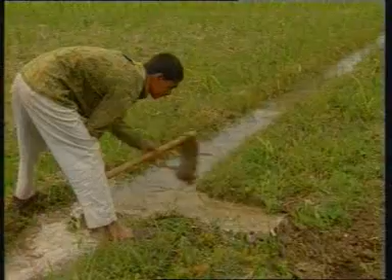India has got 1/5 of the world's irrigated area, which contributes to make it potentially one of the richest agricultural countries in the world. Irrigation has been practiced in India from very early times through wells, tanks and small channels.

But the increased demand for food production has resulted in development of various other irrigation schemes. These irrigation schemes mainly consist of storage or diversion structures and distribution systems. In this program, we will cover the distribution systems comprising of open channels.

Natural drains that exist on the earth vary in size from tiny hillside rivulets, streams, small and large rivers, to tidal estuaries. The geometry of the natural channels is in general very irregular. But normally, these channels have plenty of water and have their own course.

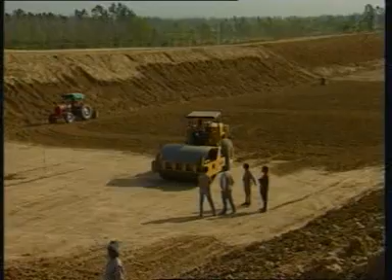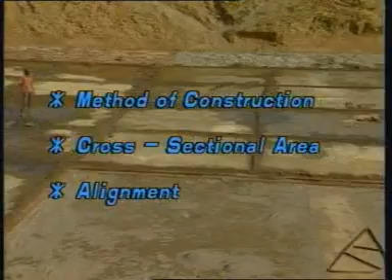Hence, they do not provide water at the desired location and in required quantities. This has resulted in human intervention with the natural channels and the development of artificial channel networks. These channels are classified according to their method of construction, cross-sectional area, and alignment. The canal is a long and mild slope channel which may be lined or unlined.

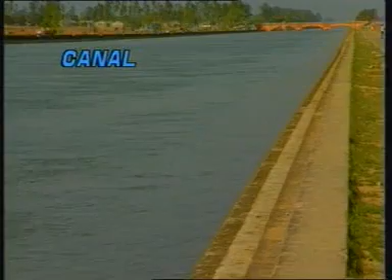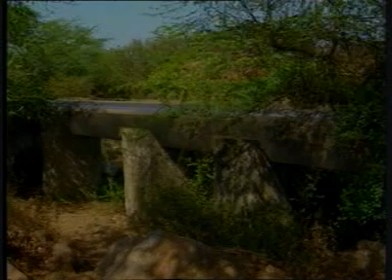The flume is a channel usually supported on or above the surface of the ground to carry water across a depression. A channel having a steep slope is called a chute. If the drop in elevation occurs in a short distance, the chute is then called a drop.

A covered channel flowing partly full to drain water across the highway and railroad embankments is called a culvert. It could be rectangular or circular. You might have noticed by now that these artificial channels are designed with regular geometric shapes.

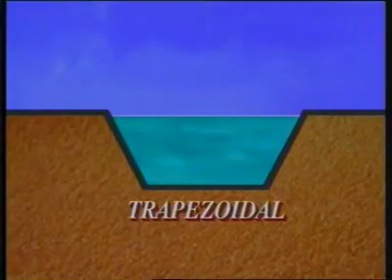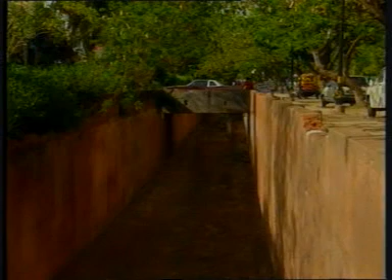The trapezoid is the most common shape for channels with unlined earthen banks. Generally, it has stable side slopes. The rectangle: channels having rectangular cross sections are built of stable materials such as lined masonry, rocks, or timber. Triangular sections are used only for small ditches, roadside gutters, and laboratory works.

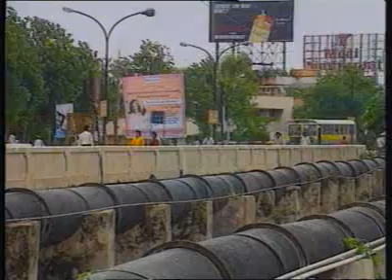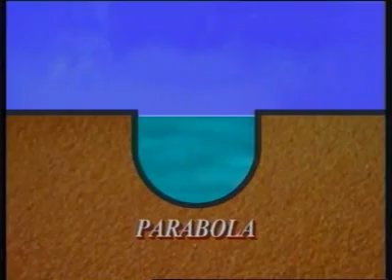The circle is a popular cross-section for sewers and culverts. In practice, other shapes are also used, where the sharp corners are rounded off. These are parabolas, round-cornered rectangles, and round-bottom triangles. Now the question is, which is the most efficient cross-section?

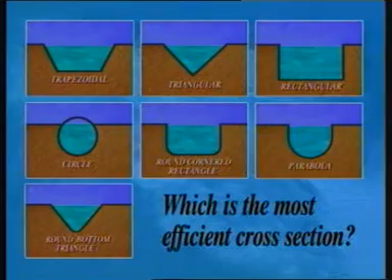The efficient cross-section is the one which, for a given slope and area, has the maximum carrying capacity. For such a section, the wetted perimeter will be minimum and hydraulic radius will be maximum. For an open channel, the semicircle is the most efficient cross-section.

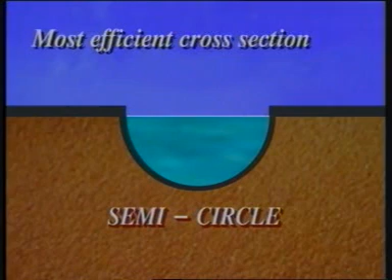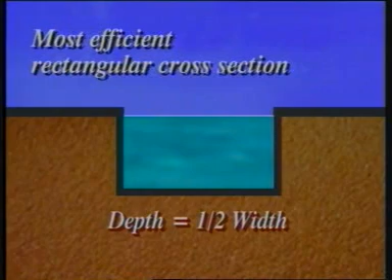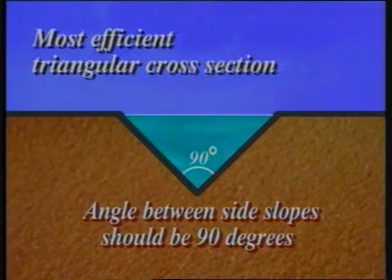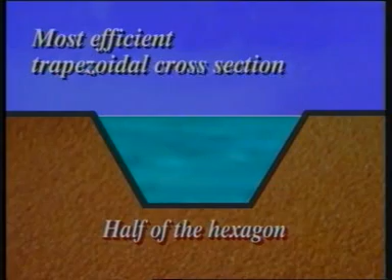However, if the rectangular cross-section is chosen, it will be half of a square, that is, the depth equal to half of the width, to make it the most efficient cross-section. If the cross-section chosen is triangular, the angle between the side slopes should be 90 degrees. But in practice, trapezoidal sections are mostly used to carry large discharges. Half of the hexagon is the efficient cross-section in this category.

The channels are aligned so as to permit gravity irrigation in maximum possible areas. The alignment should be such that it reduces the capital investments and maintenance costs and saves the transmission losses. Let us understand the alignment of canals with the help of a model.

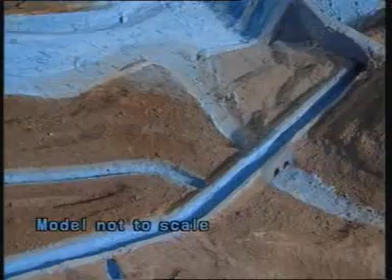Irrigation channels are generally aligned with reference to contours. A channel aligned nearly parallel to the contours of the country is called a contour channel. As some contours are higher on one side of the channel, a contour channel irrigates only the other side of the country.

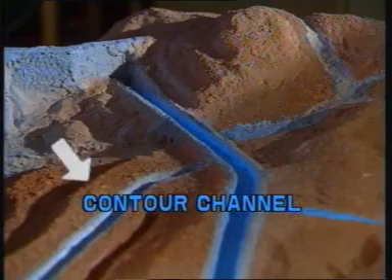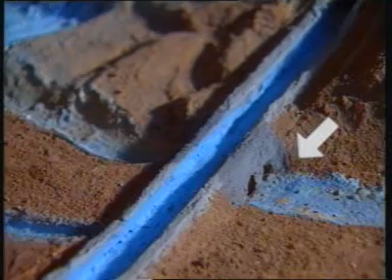While laying a canal system, we may encounter natural drainage such as a river which crosses the canal at right angles. When the drainage bed level is lower than the canal bed level, we construct an aqueduct to carry canal water. An aqueduct is preferred when the drainage is wide and of higher discharge capacity, and the water flows for longer durations.

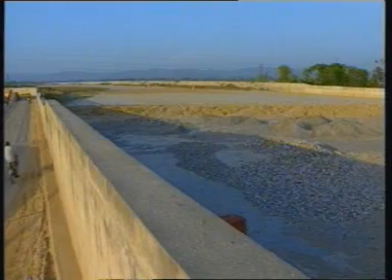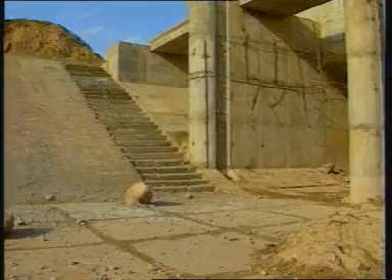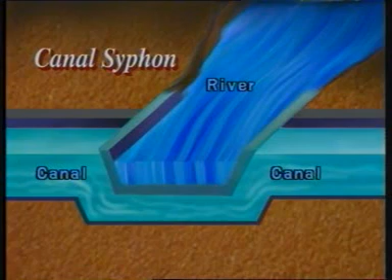But the situation may be reversed as well. When the bed level of the river is higher than the canal bed level, a super passage is constructed. It is a case when the canal is in deep cutting. However, when the headway clearance between the river bed and canal supply level is small, a canal syphon is built. The canal water is passed through an inverted siphon under the drainage, and the bed level of the canal is raised again on the other side.

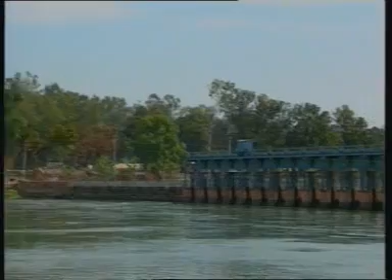If the river and canal are almost at the same bed level and the flood discharge is intermittent and large, it would be economical to build a level crossing with regulating structures. In this system, sometimes the canal supply can be augmented with river discharge.

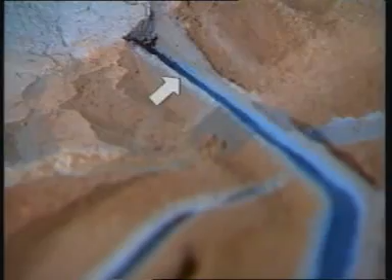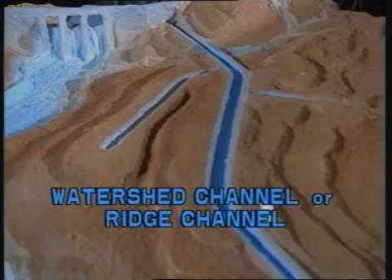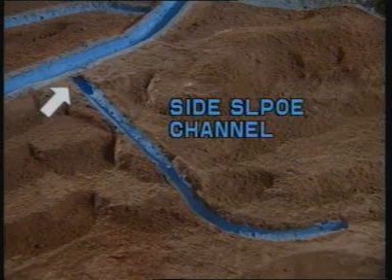After the head reach, a channel aligned along the ridge of a watershed is called a watershed channel. It can irrigate on both sides. Here, cross-drainage works are obviated. A channel aligned roughly at right angles to the contours is called a side slope channel. The cross-drainage works do not intercept this channel.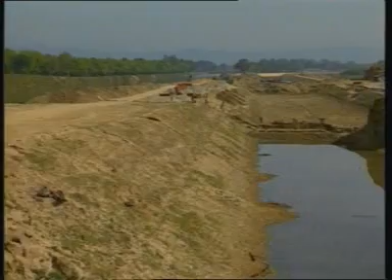However, in the alignment of the canal, there may be a situation that we may have to avoid religious places, other monuments and villages. In order to avoid these obstructions, to fulfill topographical conditions, and for diversion works, curves in the channels are introduced. Curves in unlined canals are made as gentle as possible, since they lead to disturbance of the flow, and they also have a tendency to silt on the inside and to scour on the outside of the curve. For the same discharge, the radius of curvature for lined canals is less than for the unlined canals.

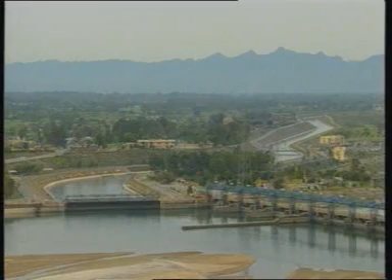Effectiveness of an irrigation channel network depends primarily on the command area it serves. Therefore, channels used for water distribution purposes require a high level at the point of delivery to serve the area under command without any difficulty. Normally, the channels with high discharge require less slopes than smaller ones. When the fields are high, adjacent to channels, water may have to be lifted from the channel.

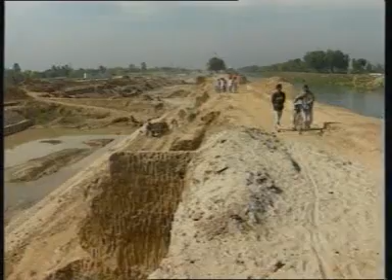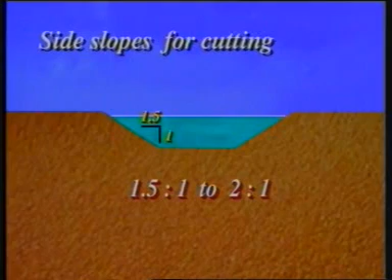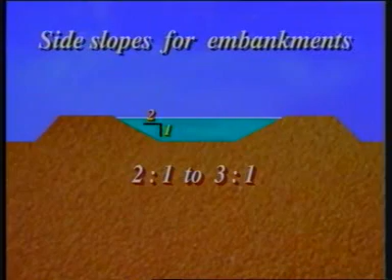The side slopes of the canal depend upon the nature of the soil in which the channel is to be excavated, depth of cutting, and the height of the embankment. Generally speaking, side slopes should be made as steep as possible and should be designed for high hydraulic efficiency and stability. The minimum slopes usually allowed vary from 1.5:1 to 2:1 for cutting. For loose sand embankments, the side slope ratio varies from 2:1 to 3:1. When canals are dug through rocks, the slopes are kept maximum, varying from 0.25:1 to 0.5:1.

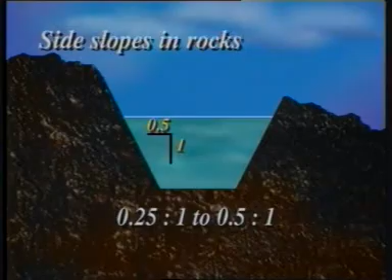In order to allow for fluctuations in water level, a freeboard is provided. The freeboard is measured from full supply level to the top of the bank. The amount of water that we feed in a channel does not reach the fields. A major portion of the water is lost through seepage. The seepage losses constitute 35 to 50% of available water at the canal head. Seepage losses are considerably reduced by lining the canal. Lining also prevents waterlogging, weed growth, and reduces silting and erosion in the canal.

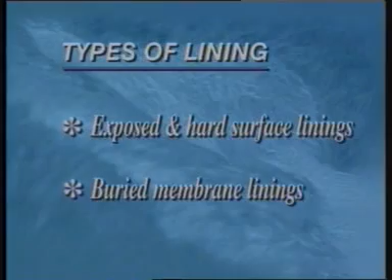Various types of lining can be mainly grouped into two categories: exposed and hard surface linings, buried membrane linings. The initial cost of exposed linings is generally high. They are recommended for use where structural safety is the primary consideration. There are several types of linings. Thick compacted earth lining may prove to be economical where suitable material for construction is available at site.

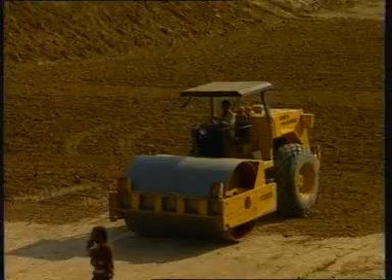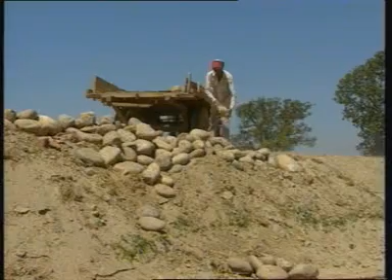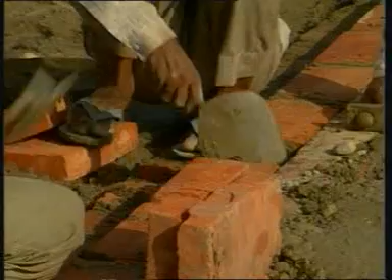Boulder lining is another economical lining where boulders obtained during excavation are readily available. It has very little flexural resistance or flexibility. Such lining is not satisfactory for canal infilling. Brick lining has been extensively used. It has the advantage of low initial and maintenance costs and quicker construction.

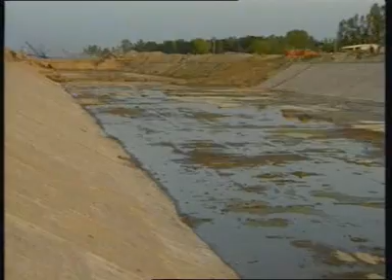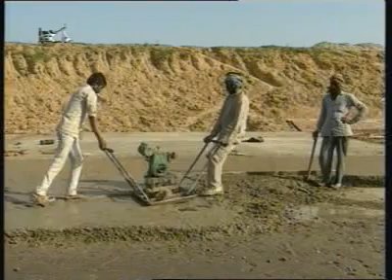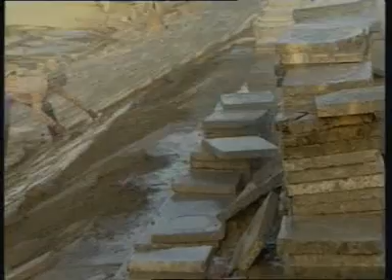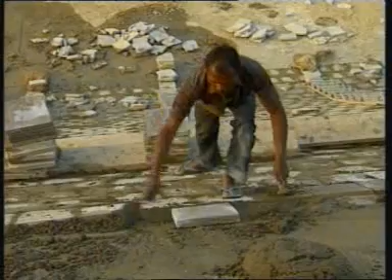Cement concrete lining is preferable because of its greater resistance to erosion and where the channel is to carry high velocity water. Precast concrete tiles are more compact and impervious. These tiles are laid in 1:3 cement mortar in single or double layers directly on the compact subgrade.

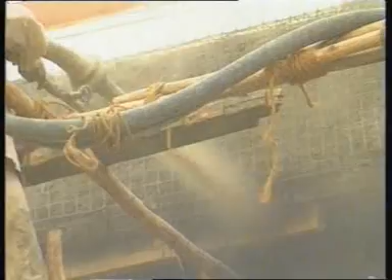In shotcrete lining, cement mortar is applied by pneumatic pressure. It can be placed over rough subgrade. Sandstone lining is used in field channels depending upon its availability and cost effectiveness.

Plastic film and a layer of bentonite protected by earth or gravel cover are cheap linings. These are commonly recommended linings. But the drawback in membrane linings is that it is susceptible to damage by weed roots. In this case, permissible water velocity is also limited in order to avoid erosion.

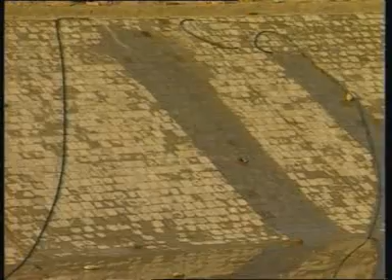Out of so many types of linings, what are the criteria used in the selection of a lining? We put this question with reference to the modernization of the Upper Ganga Canal to Shri R.C. Goel, Chief Engineer, Irrigation Department. The basic criteria are two: costs and the time that we use in their construction.

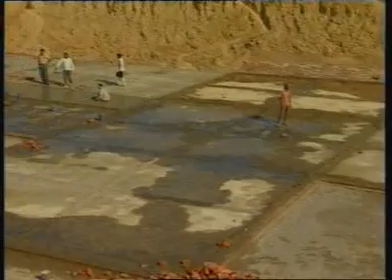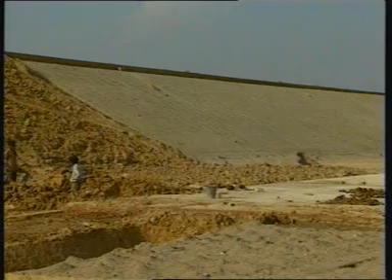As I said, concrete lining is definitely faster to do when we do it in bed. And cost-wise, concrete lining in the bed is a little cheaper also. But if we were to do concrete lining on the slopes, though the materials cost would be comparable, the labor cost would increase because it needs shuttering and all that.

Initially, we started with concrete lining because we had the experience of it and it could be readily started. Then later on, we established a factory for concrete tiles. Side by side, we started a new kiln factory to build up clay tiles.

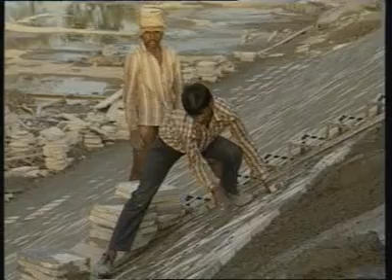In fact, in this area, ample aggregates sand is available in River Ganga, but concrete tiles are not that impervious as the clay tiles. Clay tiles are definitely far better in respect of abrasion and imperviousness. So now we are doing concrete lining in the bed, and on most of the slopes we are having double tile,

clay tile lining. By making a new lined canal, we are saving very substantial quantities of water to the tune of 240 million cubic meters, which will result in very substantial increases of agriculture production.

Now, the water is to reach the fields. For this purpose, we have a canal irrigation network. A canal which takes off directly from the headworks is called the main canal. Normally, no irrigation is carried out from a main canal. A canal taking off from the main canal is called a branch canal.

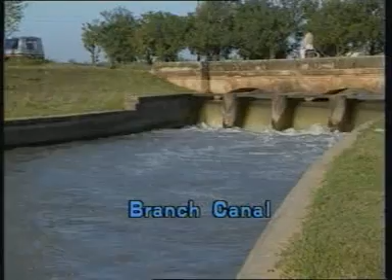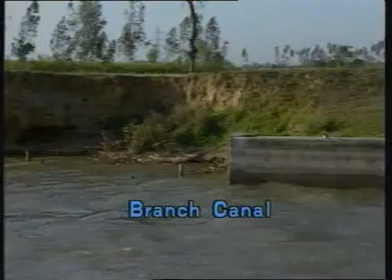Distributary channels are taken off from the branch canal and sometimes from the main canal. A distributary can be a major or a minor, depending on the discharge. Water courses are small channels, generally constructed by cultivators themselves. They run from outlets provided in the distributary channel and convey water to field channels.

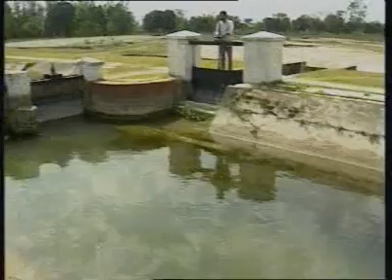For water distribution, it is necessary to adjust the discharge in a channel to any known value. This adjustment is carried out by the regulator at the headworks. In this process, sometimes it becomes necessary to run a group of channels at a time and to keep remaining channels closed. This process of rotation is known as rostering, and the whole process of distribution of water to branches and minors is termed as canal regulation.

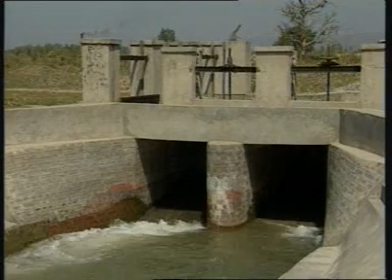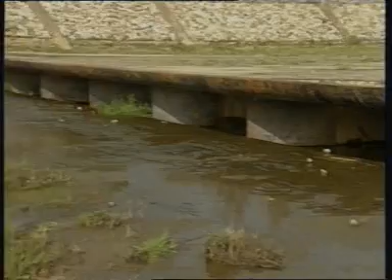In spite of regulation, the irrigation channels do not always draw their desired discharges because of silt deposition, which makes the channel shallow. Therefore, the success of an irrigation project also depends on control of silt and weed roots. In a canal, silt is removed through a silt ejector which is constructed in the head reach of the canal, a little downstream from the offtake.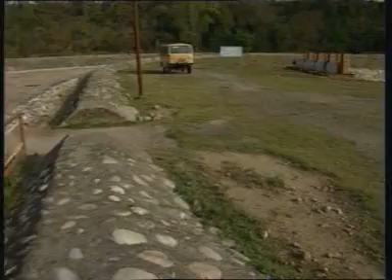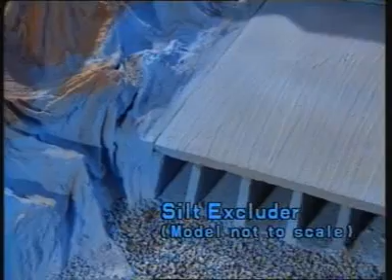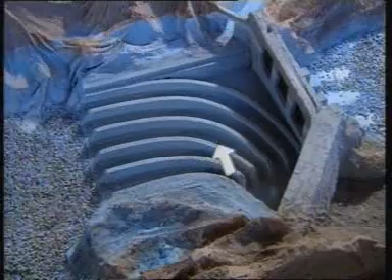The silt-laden water is led through the tunnels and flushed out through gates into a different channel. The silt excluder is another device which excludes the silt before it enters the canal. Silt excluders are constructed at the headworks and are similar to the silt ejector. The silt-laden water is led through the tunnels and flushed out through gates into a different channel or into the same river.

In this program, you have seen how much effort has gone into providing water in the canal systems so that more water can be made available. This water is precious, so we must make the best use of it.